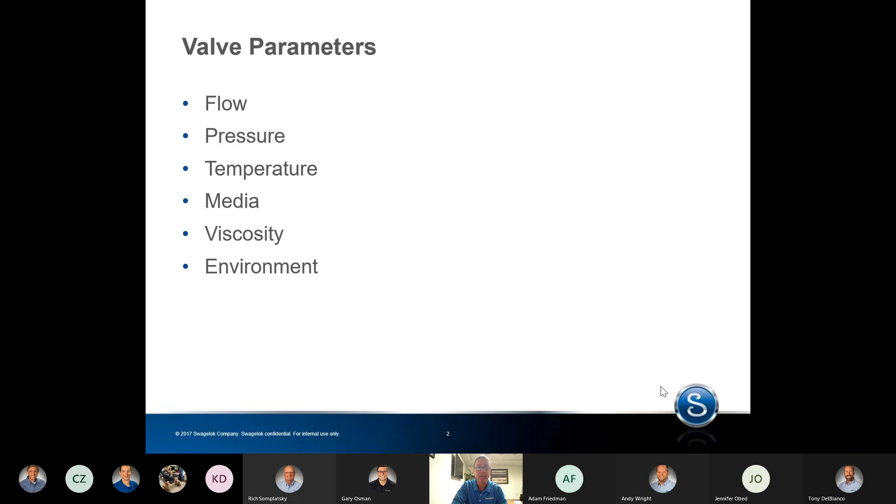So first, we're going to go over the basic system parameters that need to be considered when selecting a valve. Those include flow, pressure, temperature, media, viscosity, and environment. So flow occurs when a fluid or gas moves from an area of high pressure to low pressure. In a valve, flow is from the higher pressure inlet to the lower pressure outlet.

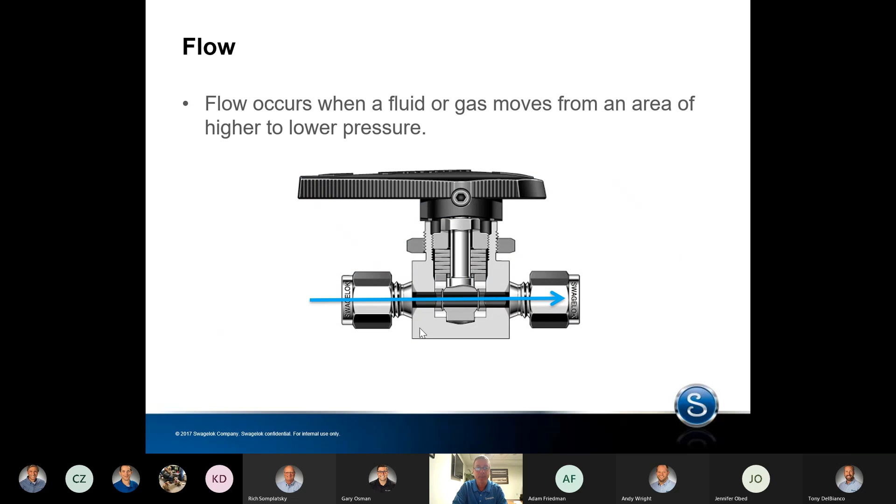The flow through a valve depends on a number of factors, including the diameter and shape of the flow path. The flow coefficient, which is provided by the valve manufacturer, can be used to help select the right valve for an application. The flow coefficient is represented in valve specs as Cv, and a higher Cv means a higher flow rate. Keep in mind that higher Cv does not necessarily mean it's a better valve for your application.

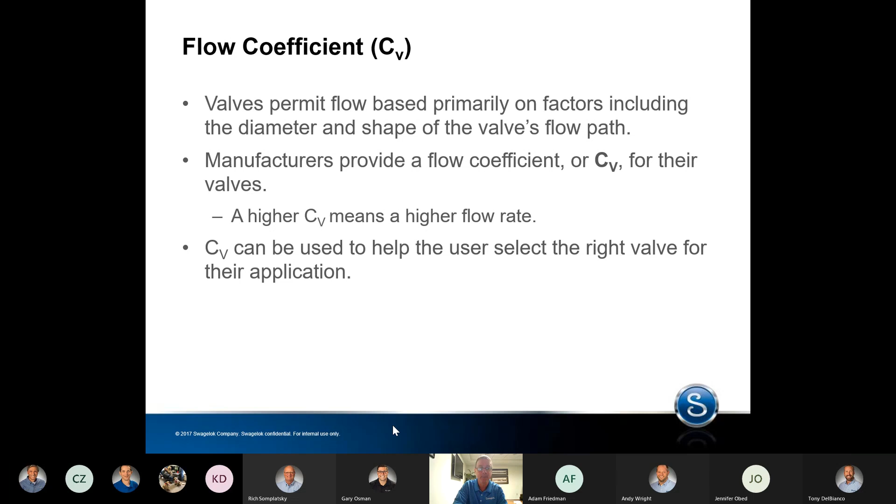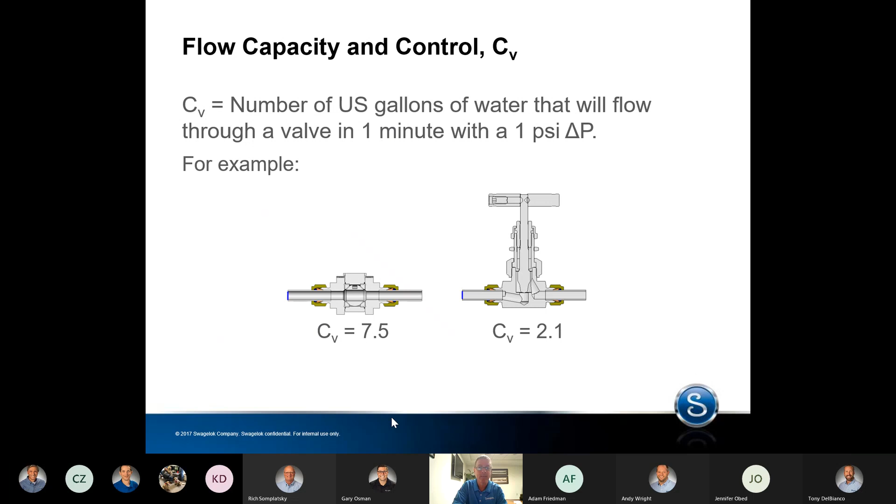The Cv is the number of US gallons per minute that will flow through a valve with a 1 psi pressure drop at 60 degrees Fahrenheit. So the flow coefficient of a valve is a relative measure of its efficiency at allowing flow. For compressible fluids like gases, calculating Cv is a little more complex, but it's still an effective way to size valves. Valve design factors that influence Cv include the size and geometry of the flow path. For example, the larger the orifice, the greater the flow capacity.

An example on this slide, both valves contain half-inch tube connections, but the ball valve on the left provides minimal resistance to flow. It has a Cv of 7.5, while the needle valve on the right has a flow path that restricts the flow and has a Cv of only 2.1. Swagelok publishes a valve sizing bulletin that you can find on swagelok.com, and it can help you pick the appropriate Cv for your application.

Next parameters in selecting a valve are pressure and temperature. And we put these two together because they affect each other. For pressure, you need to consider system maximum pressure, which is the maximum pressure the valve could see, and operating pressure, which is the normal operating condition. Like pressure limitations, every valve has a maximum and minimum design temperature also. It shouldn't be exceeded. Temperature of your application will affect the allowable pressure.

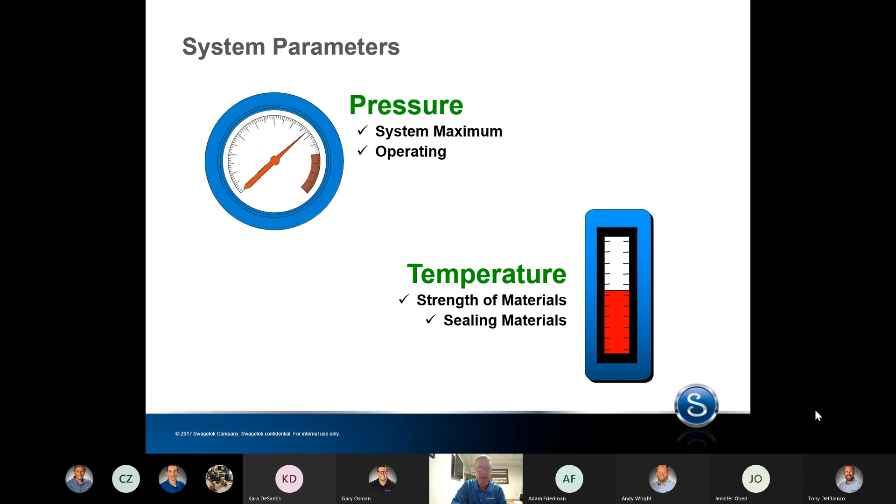When temperature rises, the strength of materials decreases. With valves, that usually means that as the temperature rises, pressure rating goes down. The seal material is often the pressure-temperature limiting component of the valve.

The pressure differential is also important for flow. Delta P is the difference between the upstream and the downstream pressure across the valve. The pressure drop occurs when a fluid moves through a valve and is required to have flow. A valve with a globe pattern will have a higher pressure drop across the seat than a similar sized ball valve where the flow is straight through. With respect to valve selection, the higher the pressure differential, the more impact system pressure might have on wear of internal components.

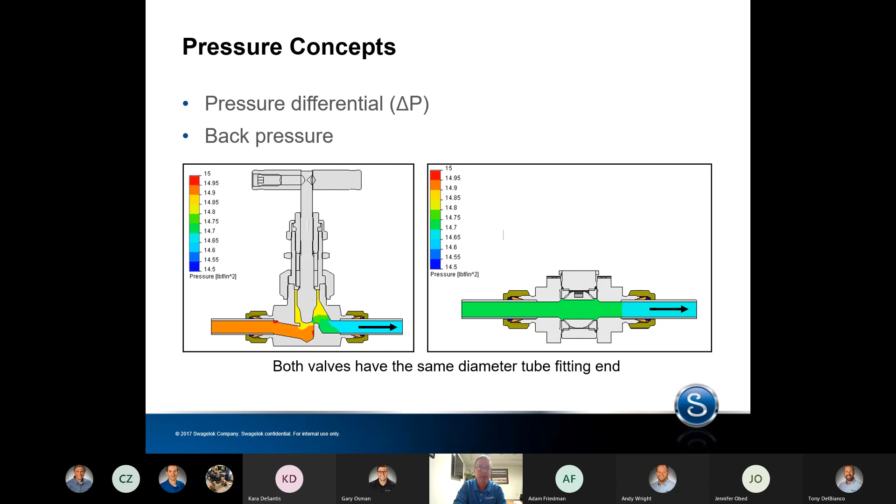System media is another important consideration. Two primary forms of system media are gas and liquid. And media can be anything from inert gases like nitrogen or argon to corrosive media like hydrogen sulfide. When selecting a valve, you want to think about valve construction and how it relates to potential leakage. For instance, a metal-to-metal diaphragm seal may be more appropriate for corrosive gases than a soft-seated valve with a plastic or an elastomeric stem packing.

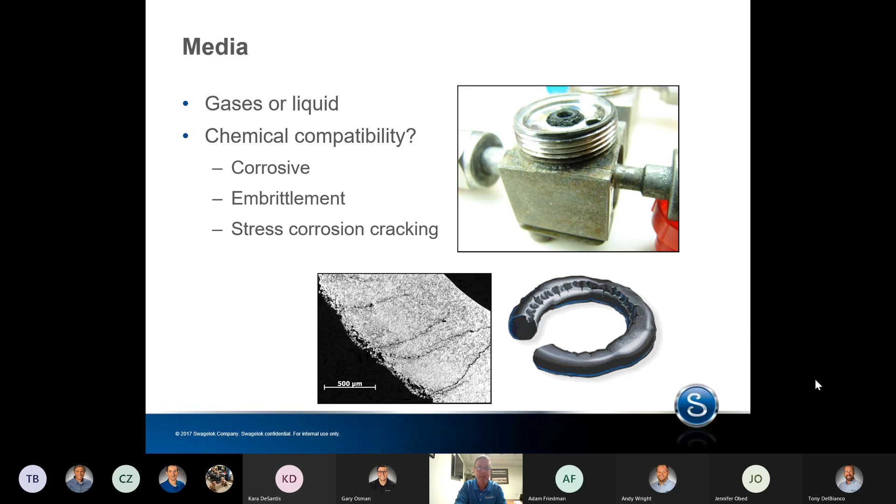Chemical compatibility is another important consideration. For example, embrittlement or stress corrosion cracking can occur if the wrong material is chosen for your media. There's a number of chemical compatibility charts available on the internet that can help you select chemically compatible components. Cole-Parmer and DuPont are two that I use often.

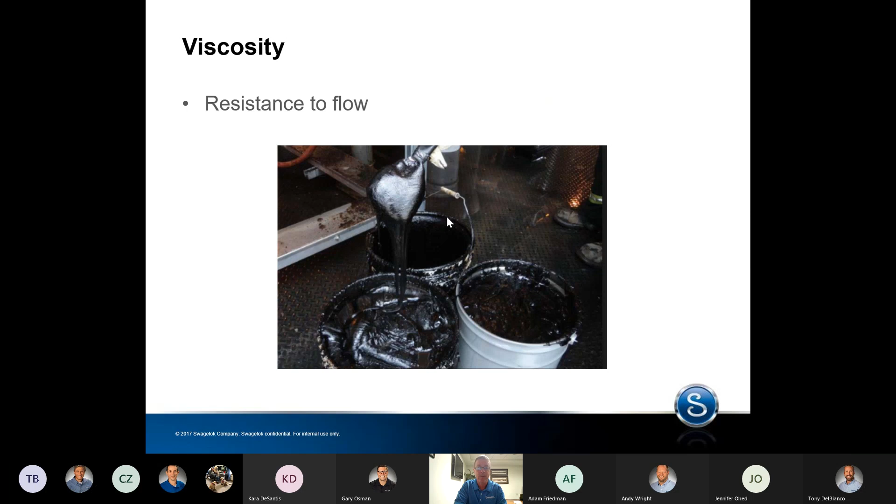The viscosity of your system media also affects flow coefficient. Tar pictured here is highly viscous, flows very slowly, and to achieve the same flow rate as a liquid with a low viscosity, like beer, you'd have to select a valve with a much higher Cv.

The last system parameter we're going to talk about is environment. It's important to consider the physical location of your valve. Will it be in a climate-controlled environment or outside exposed to the elements? The corrosiveness of the environment will also have a major impact on the material selected for the valve. For example, will it be in a saltwater environment like on an offshore oil rig? Vibration should also be considered. Will it be close to a pump or compressor and exposed to high vibration?